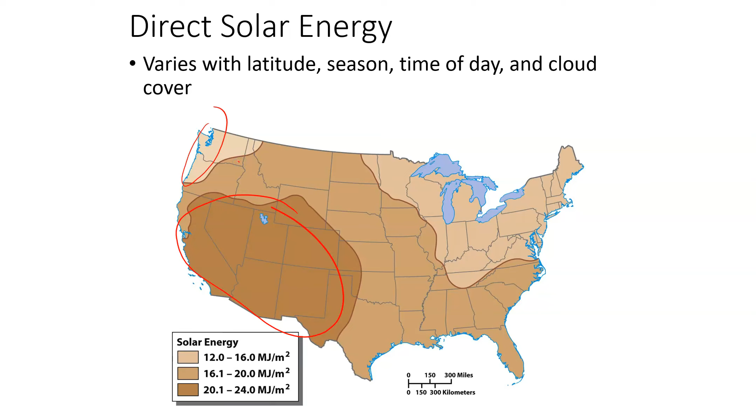So we can use direct solar energy both passively and actively. All right. So passive solar energy is basically something that doesn't require any sort of mechanical device. So we're not using like photovoltaic solar panels to convert sunlight to electricity, for example. Passive solar energy is something as simple as a window that lets in daylight and use the daylight for light in a room, right? That's passive solar energy.

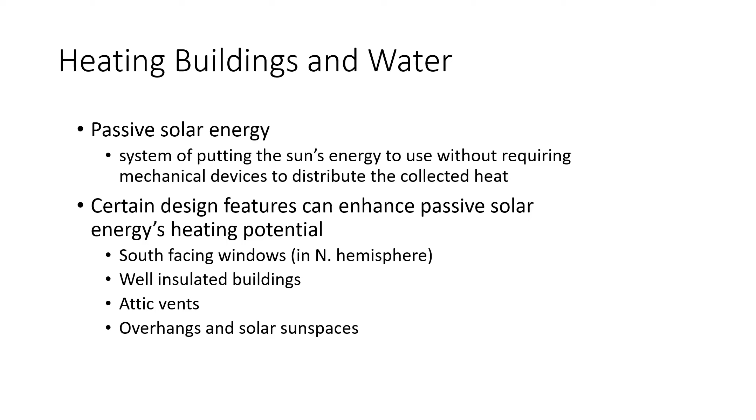Or if you have a south-facing window that's oriented properly to let sunlight in during the wintertime, all right, that contributes to the heating of that space. That's passive solar energy. A greenhouse, right? Passive solar energy. Okay, so it's just simply referring to design features, but they are not like high-tech mechanical devices to directly use sunlight for a purpose. All right.

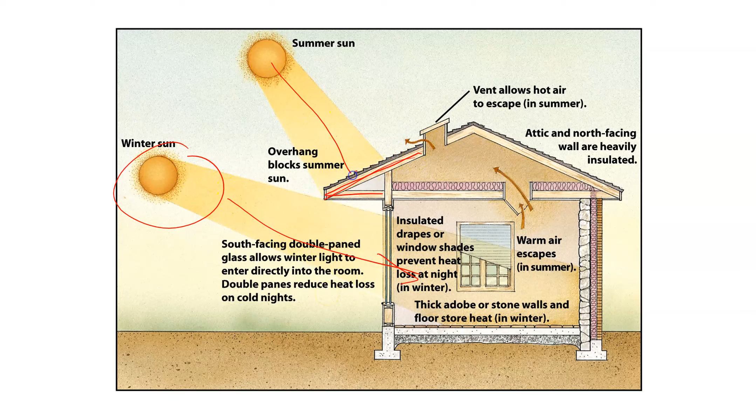Lots of architecture implements passive technologies to make the building less reliant on electricity or natural gas for heating and cooling, and more reliant on shade and sunlight during the times of year when they want it. All right. So properly sized overhangs, for example, allow sunlight in the winter when we would like the heat, but shade that window in the summer when we don't want the direct heat from that sun.

All right. Now, active solar energy, as I mentioned before, is different ways of harnessing solar energy using some sort of mechanical device. Now, we can use solar water heaters, for example, in which case they're often used as a supplement to a home water heater.

So you might have a solar collector of some sort on your roof that basically collects sunlight and uses that sunlight to warm water up, and that water would be pumped through and into a heat exchanger, in which case that would heat the water in your home or in a storage tank that gets pumped and cycled through. All right, and that might heat your water up to like maybe 80 or 90 degrees.

And then your electric or gas water heater only has to heat the water a few more degrees to get it up to the desired temperature. So that's solar water heating. It's active because we are using mechanical devices to harness that energy.

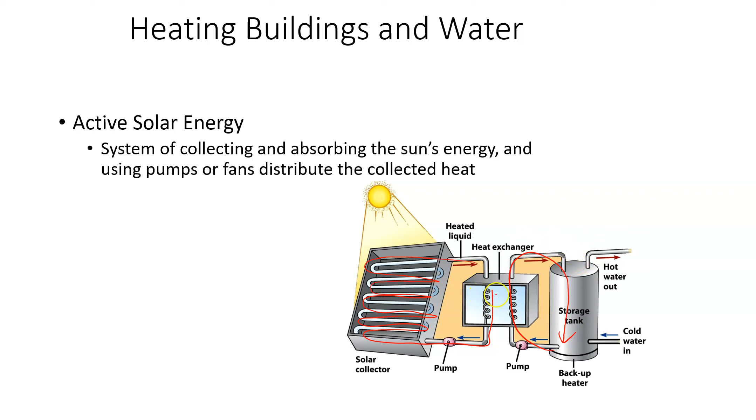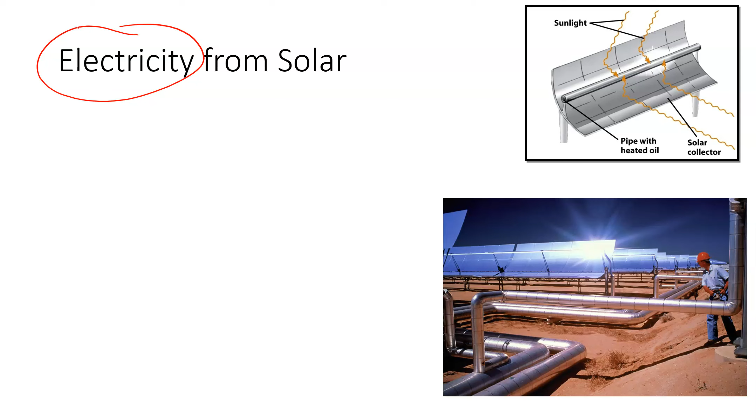Now, one of the biggest or most promising things, or what most of us associate solar energy with, is getting electricity from sunlight. And we do that primarily in two ways, right? What you guys are seeing here is an example of solar thermal electric generation. And this is different from solar panels that people put on their roof. This is utility scale. So if we wanted to have a power plant, rather than a coal power plant, we can have a solar thermal power plant, right?

And this works off of the steam turbine system, just like nuclear, coal and natural gas, and even geothermal, where we're having a heat source. That heat then boils water to create steam, which spins a turbine, which powers a generator. So solar thermal electric generation works in much the same way. But rather than combusting something in the case of coal or natural gas, or rather than running different isotopes through fission, the heat source in this case is just concentrated sunlight.

Typically the way it works is you have a concave reflective surface that focuses that sunlight on a central point. Inside that pipe is usually some form of oil or something that can be heated to a really high temperature without boiling. And that goes to a heat exchanger to create steam. That steam spins a turbine, the turbine spins a generator, and it feeds out to a grid. Some of the benefits are that it produces basically zero air pollution, and there's no contribution to global warming or acid rain, such as the case with coal.

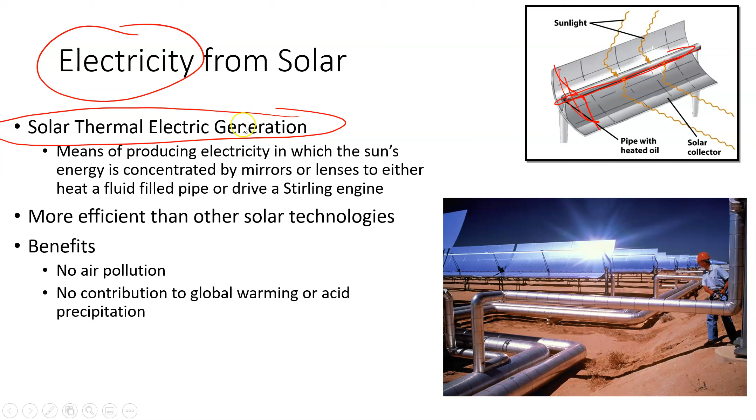What makes solar panels particularly useful is that they can be used on essentially any scale. They can power something as small as a calculator, all the way up to grid scale technologies. You just need more of them. And like their solar thermal partners, there's no air pollution and no climate change associated with them. So both of these technologies work well. Solar thermal is grid scale only; you don't really do this on a small scale. PV can be small scale all the way up to grid scale.

But they both share similar downsides or disadvantages. Both of them only produce power during daytime, which makes the storage of that electricity a challenge and makes nighttime a challenge. In both cases, a lot of space is needed. Unlike nuclear, which can have a very small footprint, solar electricity has a very large footprint. It's generally more expensive in the short term than fossil fuels, particularly the installation costs and getting it going. Over the lifetime, they definitely pay themselves back in a relatively short term, but it is a very large upfront cost to install these systems.

And then, as mentioned before, the amount of space we need is a challenge. To generate electricity on the utility scale, reliable scale, a lot of space is required. One of the biggest arguments against grid scale solar systems is that we're likely to put these where it's often sunny, like the desert Southwest. And desert is a pretty important and fairly fragile habitat. So if we're installing tens to hundreds of square miles of solar panels in the desert, that's obviously going to have negative impacts on the desert ecosystem. Now, the nice thing is, a lot of those downsides of solar electricity can potentially be overcome without any major technological advances.

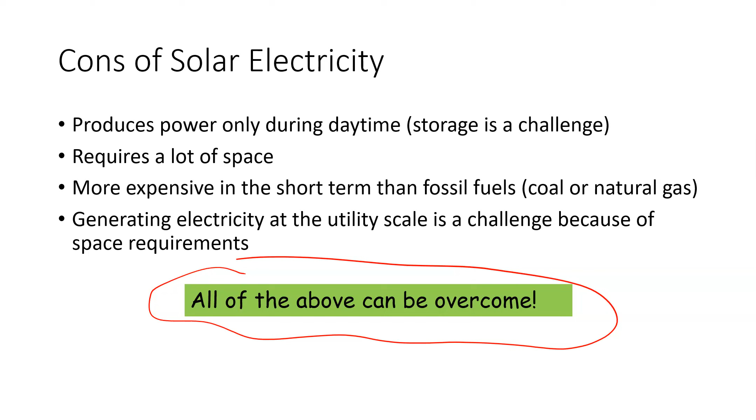Various types of battery storage or hydro storage, et cetera, can overcome the nighttime problem, right? Rooftop and roadside installation can kind of overcome the space challenge. So we already have spaces that are being used, right? We can put solar panels on top of those spaces, for example, rather than putting them out into native habitats or unspoiled habitats. Okay.

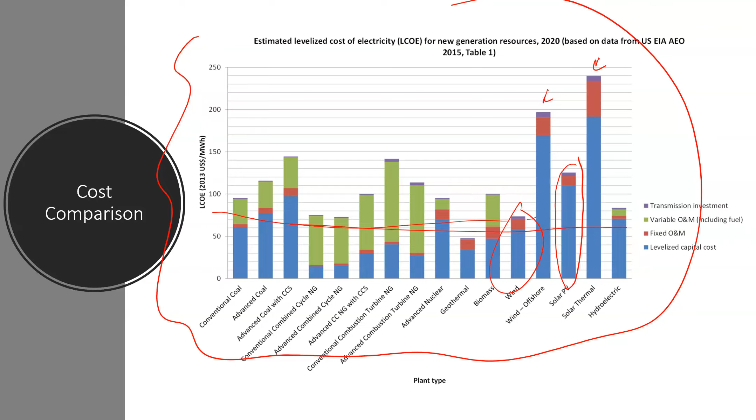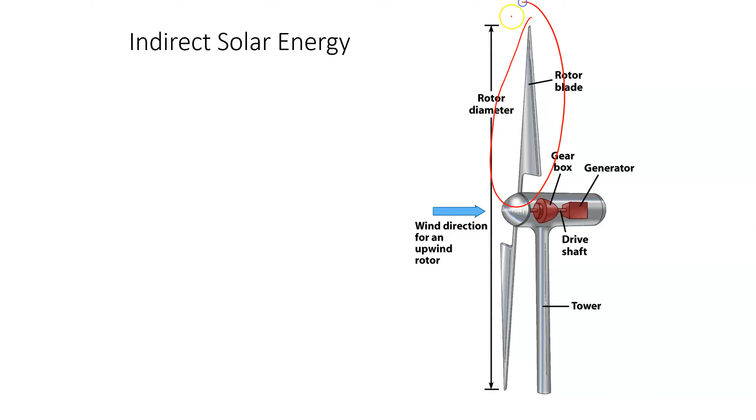All right, let's move on to wind. Right, this is something we should all be familiar with because we have these wind turbines in and around Walla Walla. Can't really be anywhere in Walla Walla and not have wind turbines within eyeshot. Okay, now wind turbines do operate on a turbine system, but what you're actually looking at when you see wind turbines, those blades, those are the turbine, right? So instead of using heat and steam, we're just simply using the movement of air when it hits these blades that cause those blades to spin. That's your turbine. Inside that turbine is your generator, right?

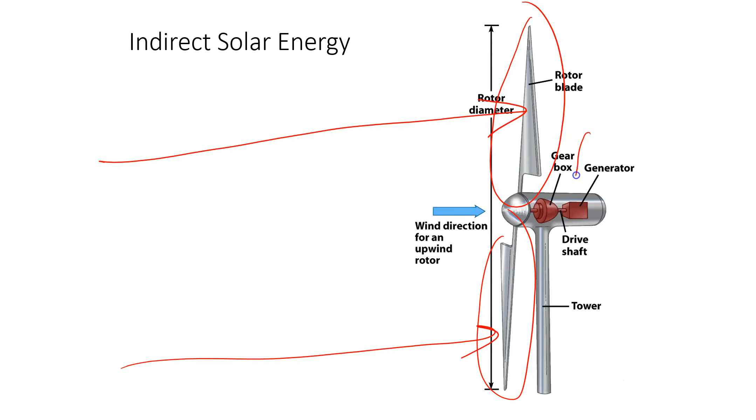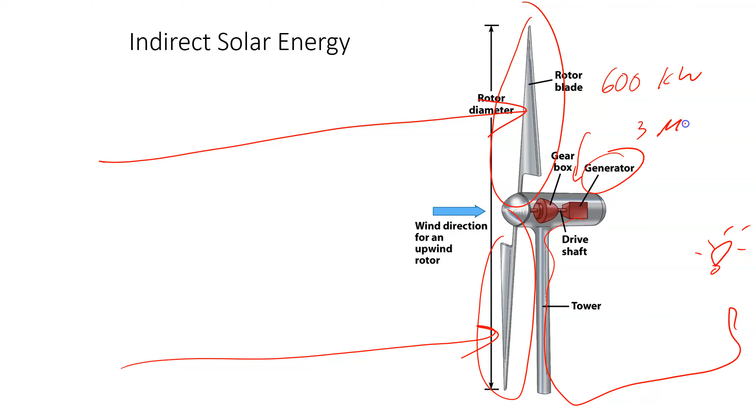So the direct movement of air spins the turbine, powers a generator, that generator then sends electricity out to the grid, power a light bulb or something, right? Now, wind turbines range. A lot of the turbines we have around here are about 600 kilowatts each. It's really common, but the really big wind turbines and offshore wind turbines can be up to 3 megawatts, so 3,000 kilowatts or 3 million watts per wind turbine.

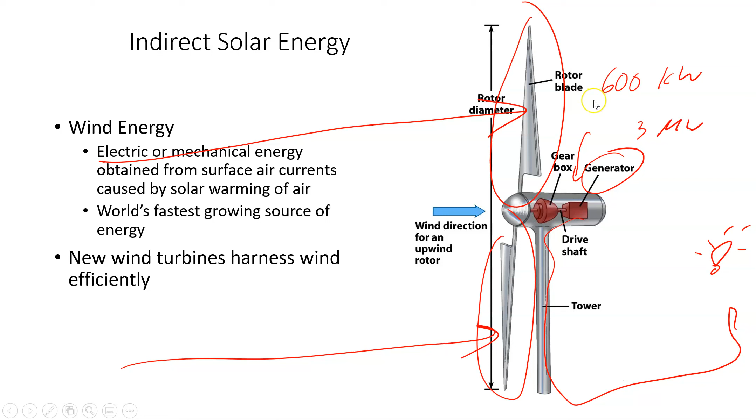Okay? And it is the world's fastest growing source of energy right now, and that's because it is right at that price point that makes it cost competitive, and it helps a lot of countries to meet their renewable and clean energy goals. Okay, so wind energy, I think a really important point. So, obviously we need lots of space for wind energy, similar to like solar energy.

But the nice thing about wind energy is we don't actually spoil the land or like cover the land in the same way. So, for example, if we take a look at the wind turbines in this drawing, right? So this is a rural area, so we can use this area for farming. We can use it for ranching or other uses, while also using it for wind. And now that would not be the case if we decided to turn this into a solar farm, right? Much of that space would be covered by those solar panels, so we wouldn't be able to have multiple uses for that land. Basically, it'd be only solar power.

In the case of wind power, you can plop wind turbines on a ranch or a farm and continue to ranch and farm that land and produce electricity at the same time, right? So definitely an attractive endeavor in that case. Plus, it creates extra income for farmers and ranchers. All right. There are relatively few environmental problems with the wind turbines. Now, people don't generally like their appearance, right? Particularly in our natural landscapes, right? It's not a natural feature.

Okay. But there are problems if they're not properly sited based on like bird migration, etc. They can have the downside of killing some of our really important bird species, or even in some cases endangered species. All right. Now, biggest constraint, I put cost here. It's actually not true. They're very much cost competitive, other than the fact that there's the upfront cost of the initial installation. But they are very much cost competitive when you look at the life cycle of wind turbines. So it's really just the cost of the transition to a new power source. They're not more expensive than other energy sources.

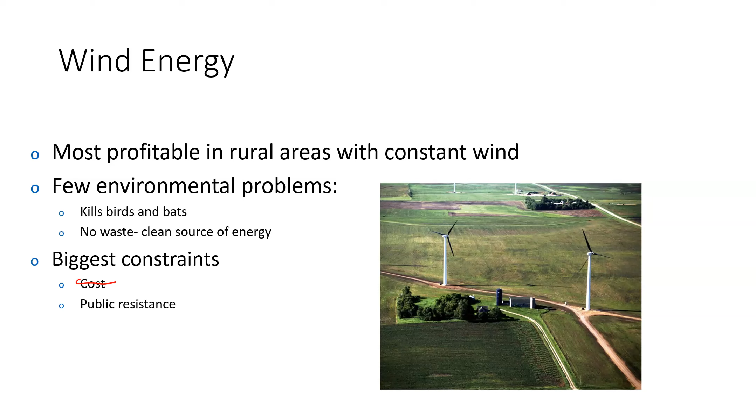All right, but there's definitely public resistance, very similar to our issues with nuclear power. They're obviously not dangerous in a sense, but people just, maybe they like the idea of wind power, but they don't want it in their backyard. When they look out their window, they'd much rather see a more natural landscape, not these giant wind turbines.

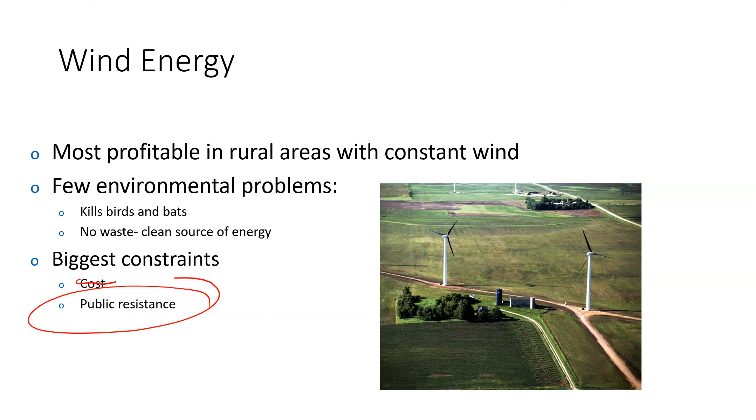Okay, now moving on, we're almost done. We have biomass and biofuels. Okay, so when we talk biomass and biofuels, we're just basically talking about either plants themselves, so wood or other vegetation, or materials that we derive from plants. So, like wood and biomass burning, so like combustion.

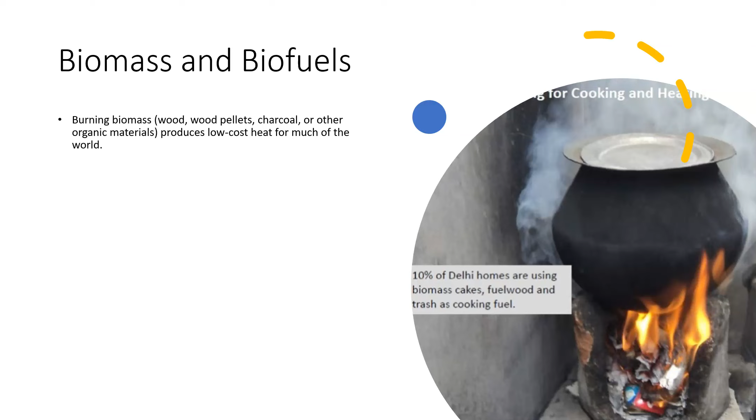Much of the developing world still relies pretty heavily on the burning of biomass. All right, so wood pellets, charcoal, other organic materials, because it produces low cost heat and no really particular special technology. So for cooking, for heating, etc. Now, biomass, of course, is renewable because when we use biomass, we can grow new plants in its place. So as long as we're not using it more quickly, then nature is able to replenish it. It is a renewable resource.

Now, there are locations in the world where it is being used a little bit too quickly. So it's led to some over harvesting, like in our tropical dry forests, like we talked about earlier in the year. And not to mention that burning biomass, anybody who's had a campfire, right, understands that it produces smoke, and that smoke contains particulates, and under the wrong conditions can cause carbon monoxide poisoning. So when people cook indoors, for example. And it also produces nitrogen oxides, which contribute to what's called photochemical smog in our cities, and can contribute to acid rain.

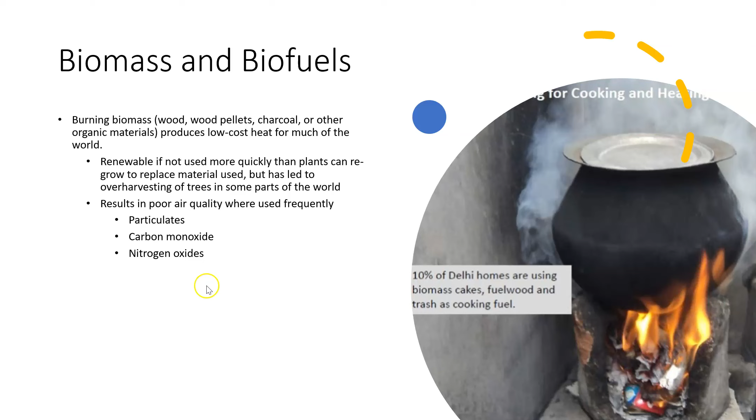Right now, our biofuels, on the other hand, are liquid fuels such as ethanol and biodiesel that we derive from plants. And so, what's pretty handy about them is they have the potential to replace things like gasoline, diesel, and jet fuel with a renewable source. So we could use things like algae or other plants to produce oil to basically replace diesel fuel, or we can use things like corn or other plants to create another liquid fuel that's combustible.

Now, liquid fuels are actually particularly hard to replace because they can vaporize and be combusted. Our liquid fuels can. And they're relatively dense in terms of how much space they take up and how much energy they do produce. And so liquid fuels are particularly useful for transportation because you can carry a fairly large amount of energy in like a tank, for example, which makes other solid or gaseous materials a little bit more difficult to manage for transportation anyways.

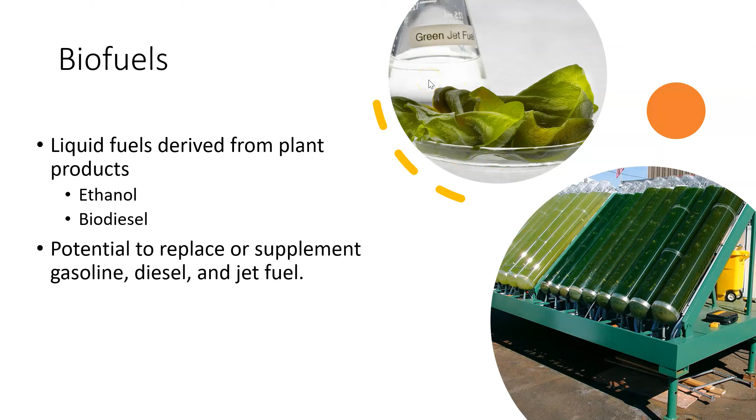Okay. So biofuels, like biomass burning, are renewable, right? So we grow the plants, and then we process those plants in a certain way to either produce some oils for biodiesel, or we ferment them to produce ethanol, etc. All right. So some major advantages. Yes, renewable, and we could kind of consider them carbon neutral in a sense, right?

So when we burn them, yes, they produce carbon dioxide, very similar to what fossil fuels would. But unlike fossil fuels, we are removing that carbon dioxide from the atmosphere when we grow the plants to create the biofuels. So, yes, we produce carbon out to the atmosphere, but when we grow the plants, we pull that back into the plant again. So it's more carbon neutral. It's not really the whole story because we're often still using diesel machinery to grow the plants in the first place, but it's definitely less of a carbon footprint than just directly burning gasoline or diesel fuel.

All right. Now, some major disadvantages. We have a big increase in land use and water for agriculture because we would essentially be turning a lot of agricultural land to make fuel as opposed to directly growing food. All right. And then, of course, we also have the food issue. If we're converting much of our agricultural land to growing fuel crops, or we're using food crops like corn to create fuel instead of food, that creates problems or potential food shortages and so on.

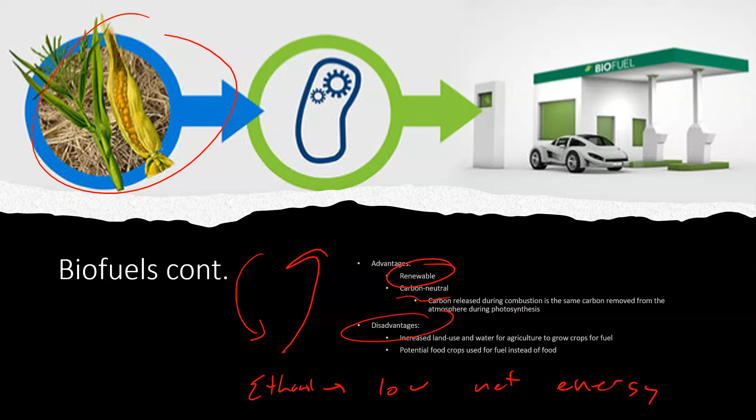Not to mention that ethanol, especially, is low net energy, particularly ethanol that we get from corn. So basically, the process to grow the corn, then ferment it, then extract the ethanol requires a lot of energy, and we don't get a whole lot out of it. I mean, we get more energy out than we put in, but it's not super high net energy like other sources would be. All right, that takes us to the end of this session.